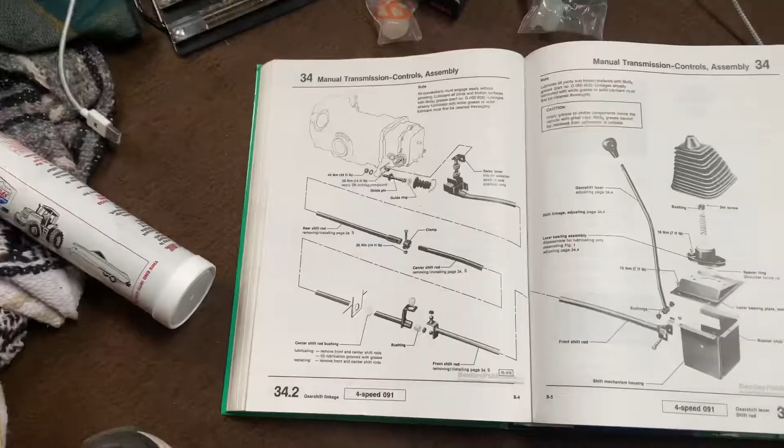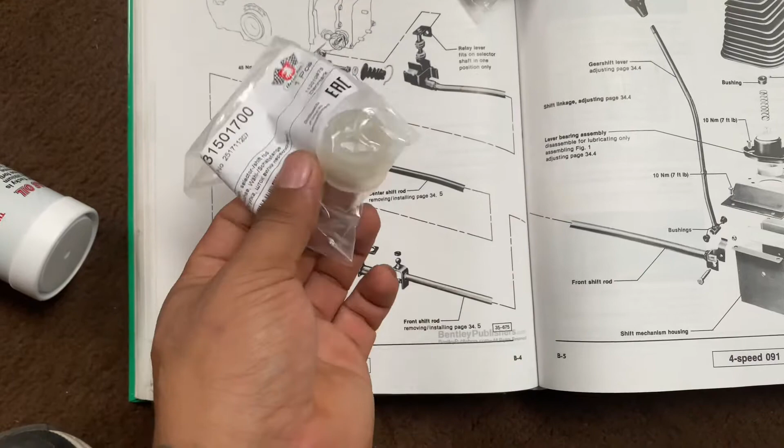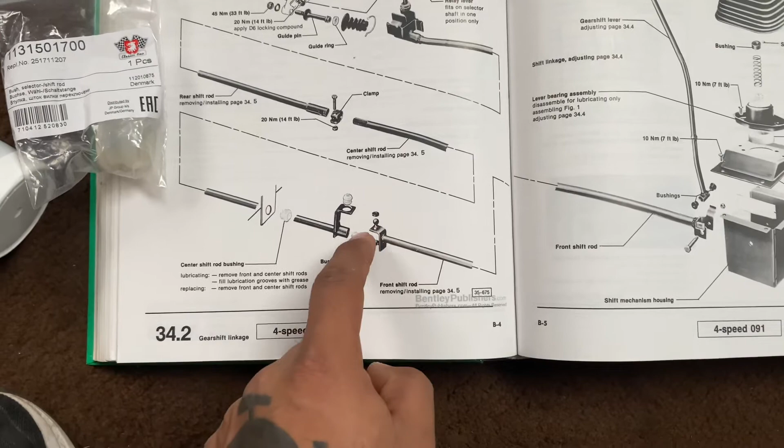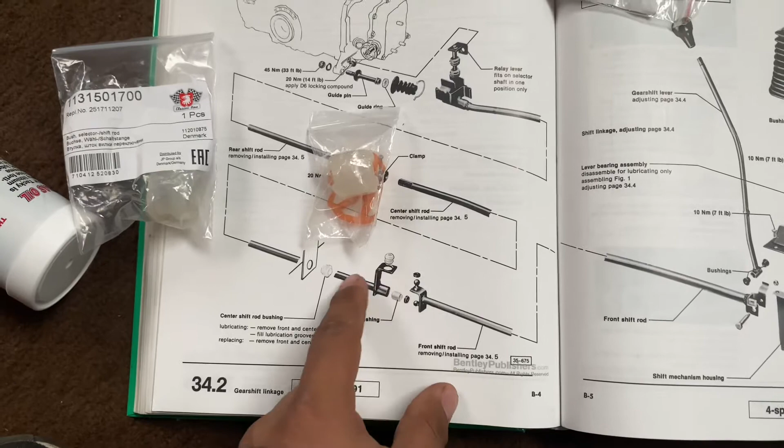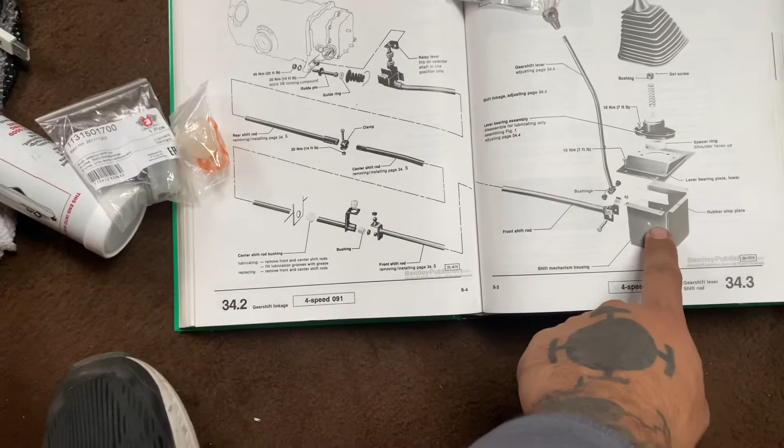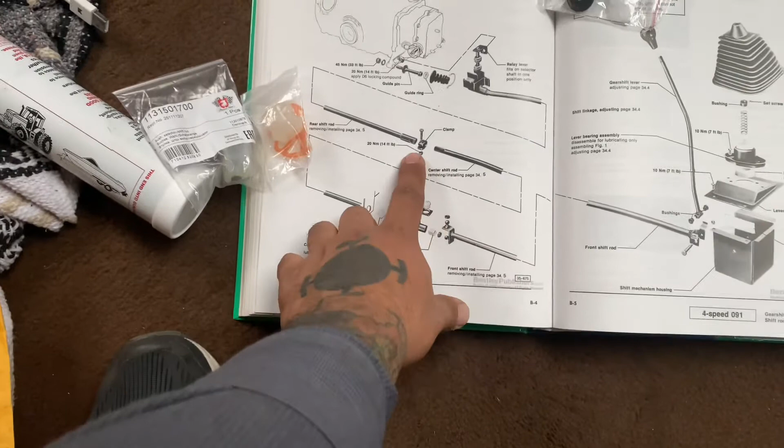So I think I gotta remove the box, then this bolt and nut here, and this one will pull out forward. I gotta mark it down here, that's towards the back. Mark it so I know how it fits, and then I can pull this out through the front.

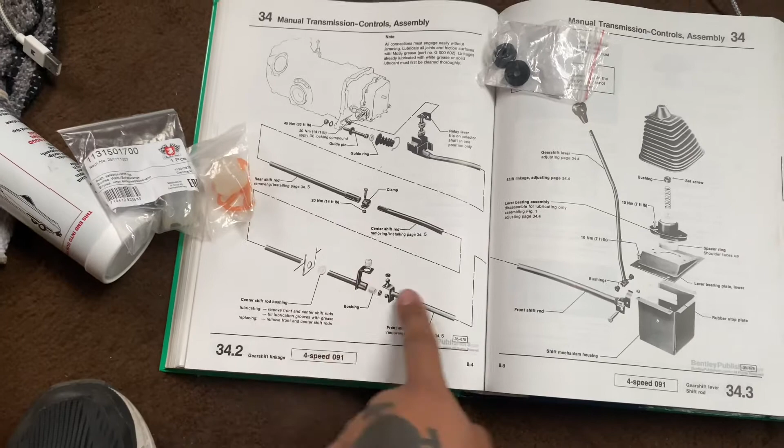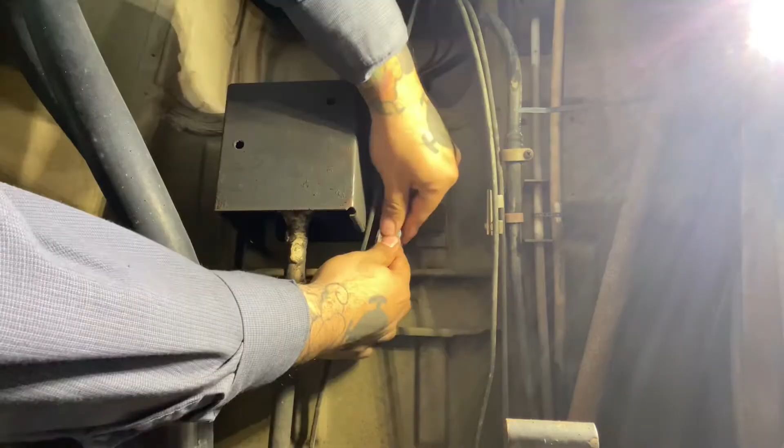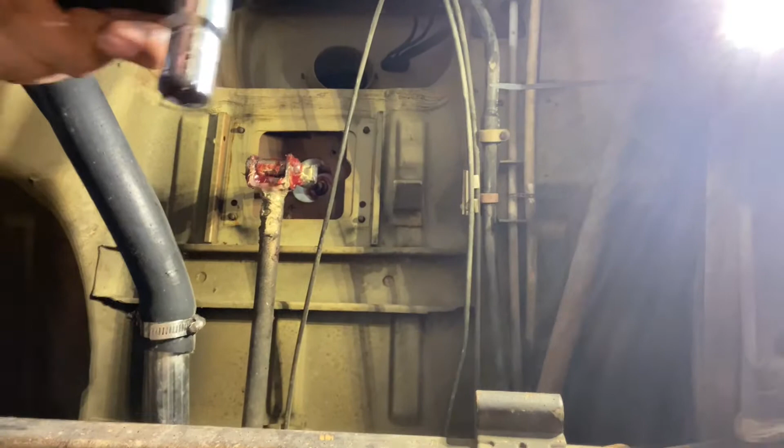So these 4 bolts are 10mm. Let's take those off. 13mm, 10mm.

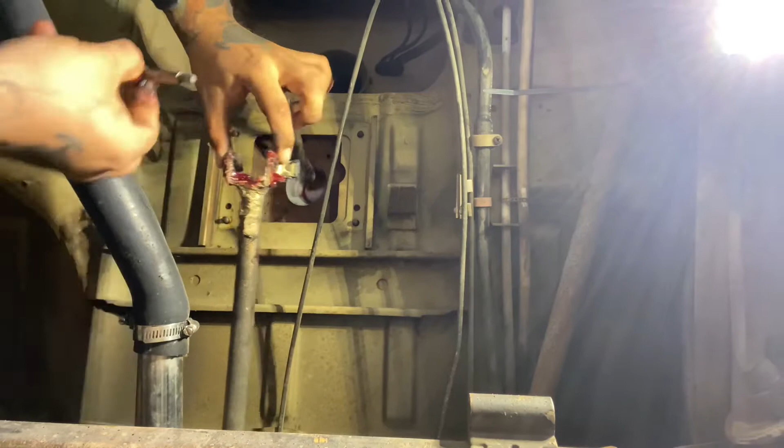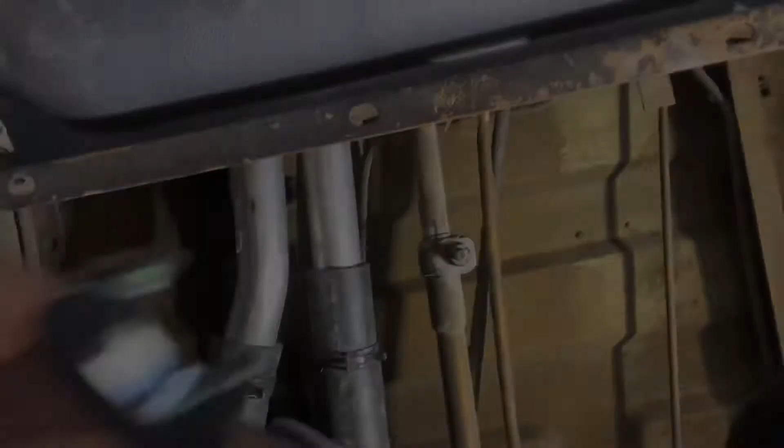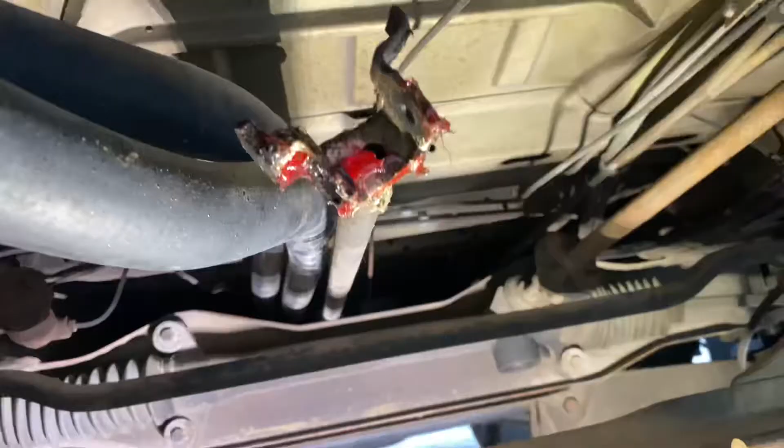And there it is. So now I'm behind the gas tank, and I gotta take this nut off so I can pull the whole thing forward and out. Before you take this one off, make sure you mark it so you know where to put it back. This is a 13mm bolt. And then this can slide out forward. Should be able to pull this out forward.

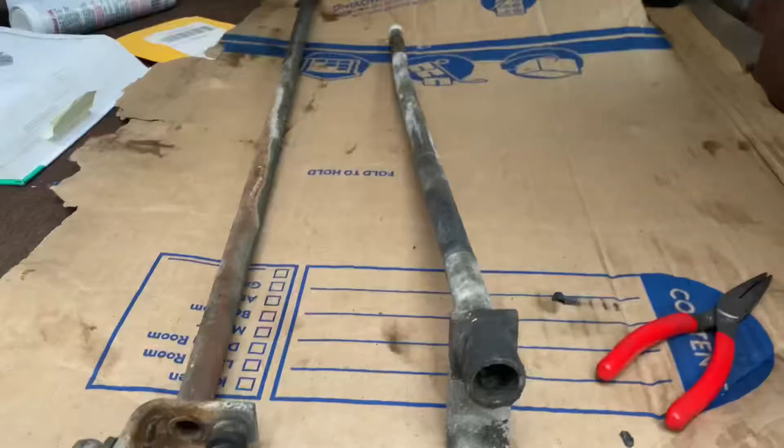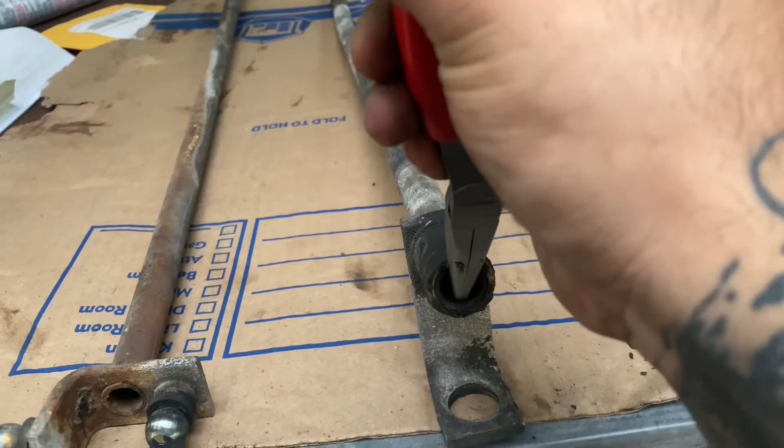So here are the 2 shift rods, and I gotta replace the bearing in here, which you can replace with this. You can just take this out, use a screwdriver or something, pry it in here, and pull that old one out. It comes out pretty easy. Takes 2 hands though.

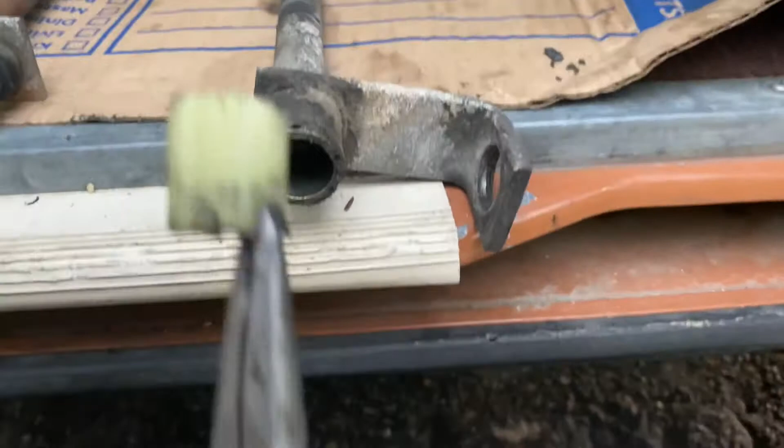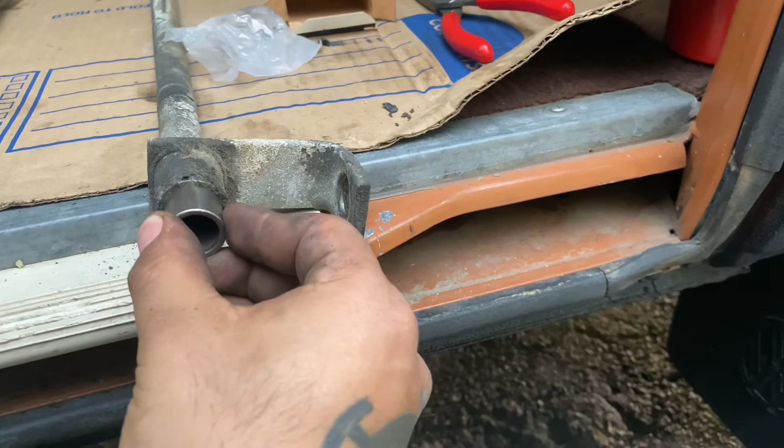There you go. Put the new one in. Here's the new one. And it doesn't fit. That's too big. I'll just use the old one. Seems pretty okay, I'll just flip it.

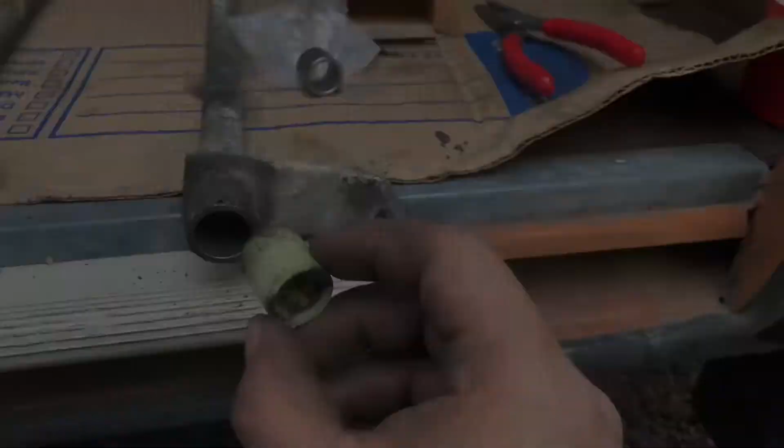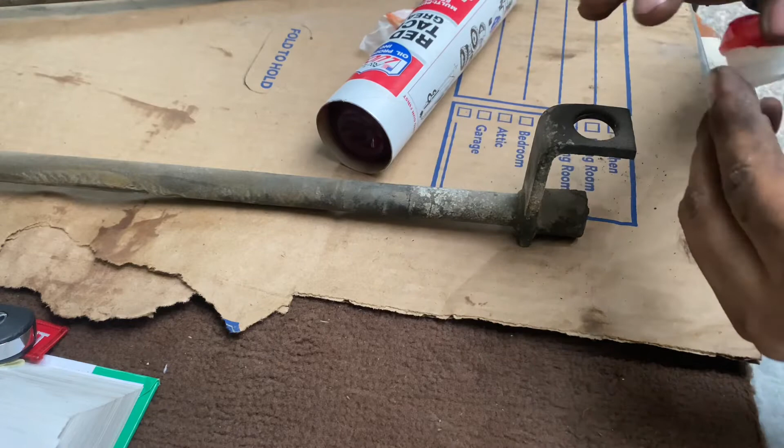So we're gonna need to insert this into here, but probably want to wear gloves. Probably want to grease the inside. Let's try the other way. There you go. Okay.

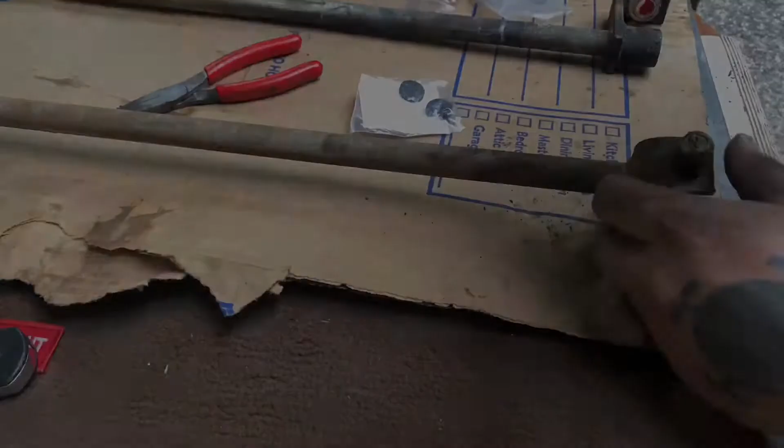So now I gotta install these onto here. There's 2 of them, here and there. We'll cut the old ones off. So go right on there. Right, like this. Probably want to grease all this up.

So that'll go over, there. And this will go in like that. See, that's a lot tighter, no slack. No slack there. That's good, okay.

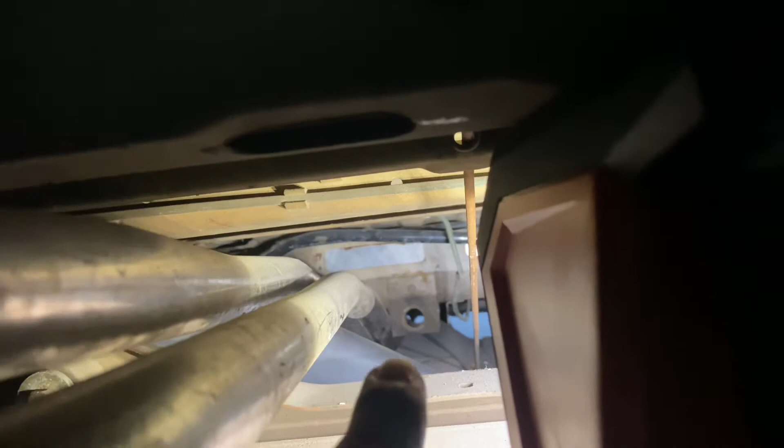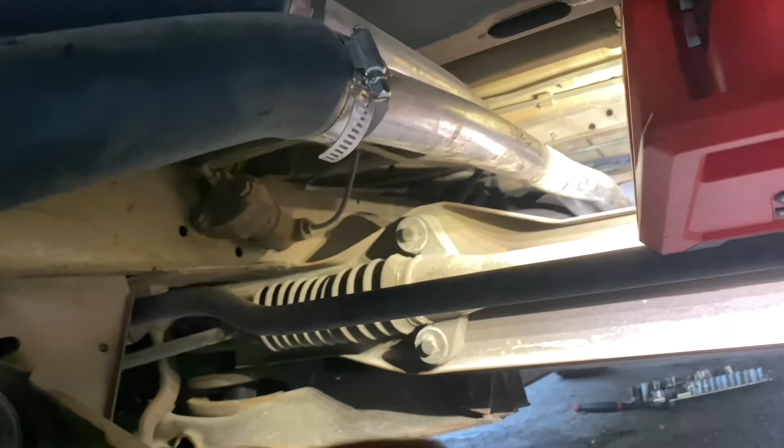Now this big one goes on a tab under the van. I'm gonna see if I can install that. So that bushing has to go inside there, but it's halfway between the gas tank, so it'll be hard to reach in there. I'm gonna see if I can grease this and put like the end of a broom and shove it in there.

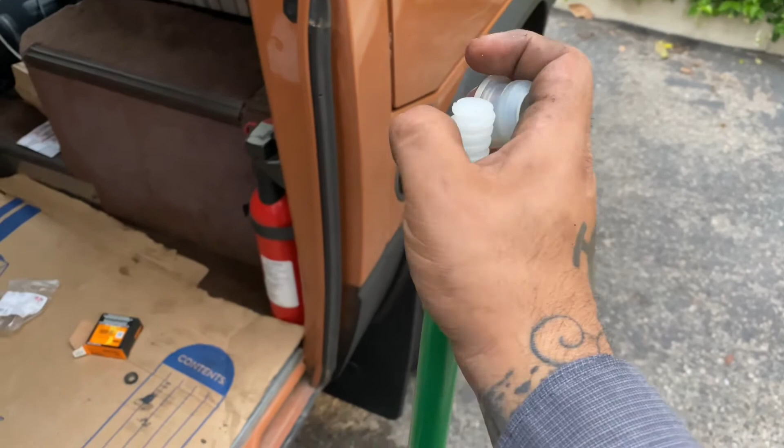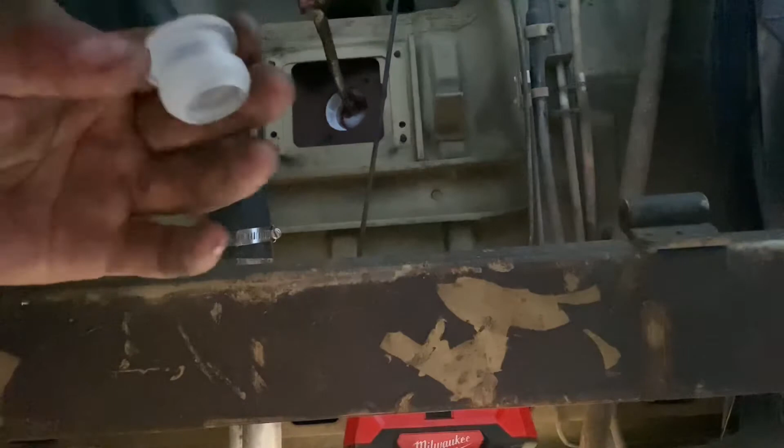So I figured out a way to put this thing in there. This is a broomstick, and this thing will fit right over it, but it won't go through, so you can push it. I'll just put grease on here and push it in like that. I'll show you, I'm gonna grab some grease and put it on here, like so. This is my mother-in-law's broom. She's probably gonna kill me.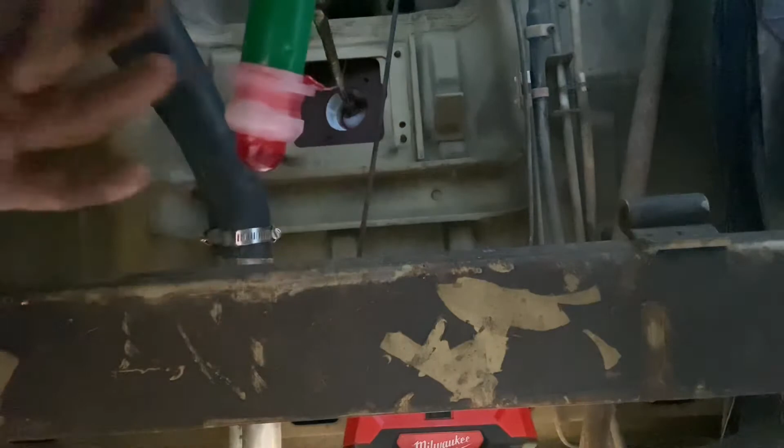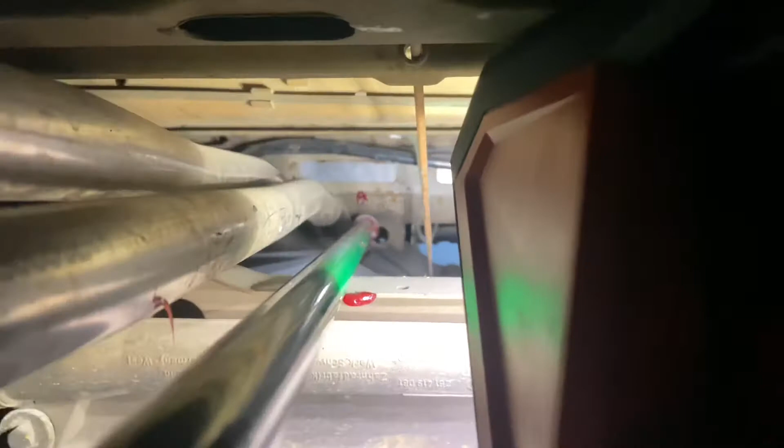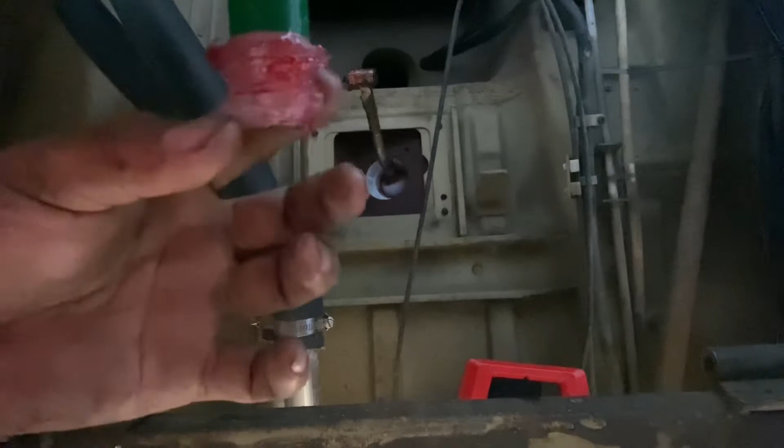And then you want to put it back there. Take your special broom tool, line it up back there. So I was having a problem that this was too long and it wasn't letting the front side compress. So I had to sacrifice my mother-in-law's broom. I'm gonna buy her a new one, but this should work now that it's shorter. All right, there it is.

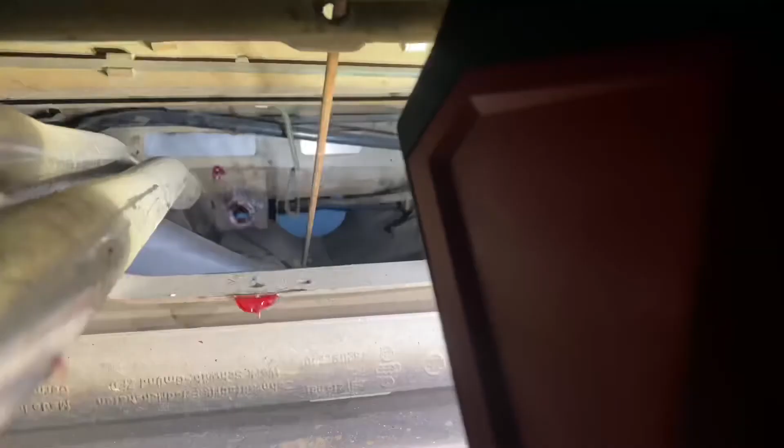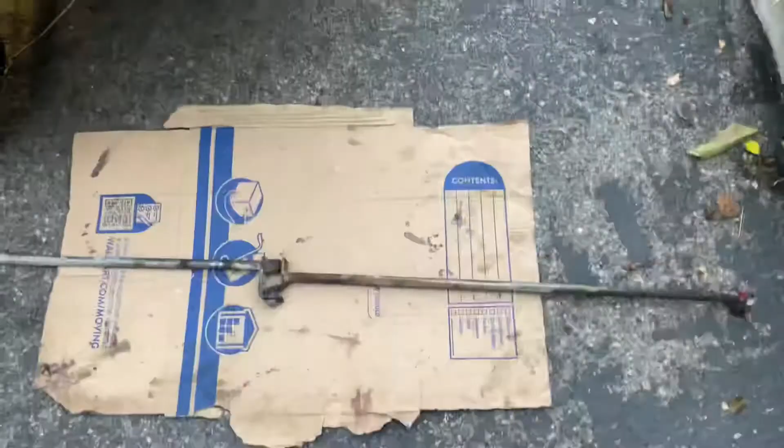Took about 20 minutes. I think you should probably heat that before you put it in with the broom, but it'll go. Grab your shifter rod, put some grease on here. Just put extra everywhere, it doesn't matter. Ready to go back in.

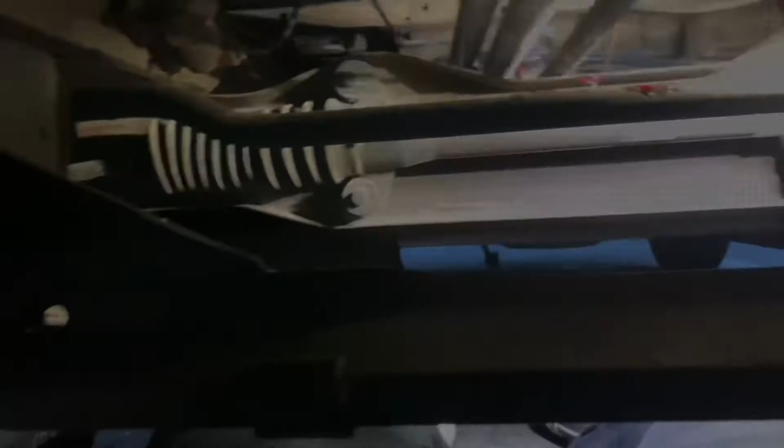All right, now that's back in there. Let's go to the back. Have your girlfriend push from the front. Push, okay. Okay, there, you're lined up perfect. Make sure your lines are lined up.

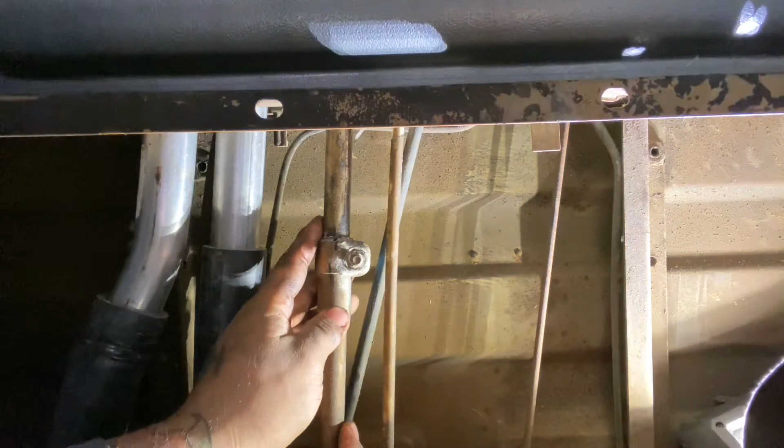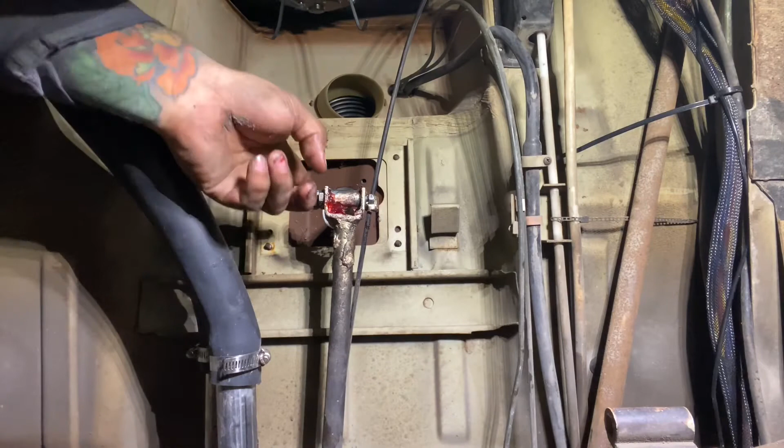And that's it, and then tighten these back up. So put this nut back on, and then the big end is a 13 millimeter, the small end is a 10 millimeter. So now you want to put on your gearbox again.

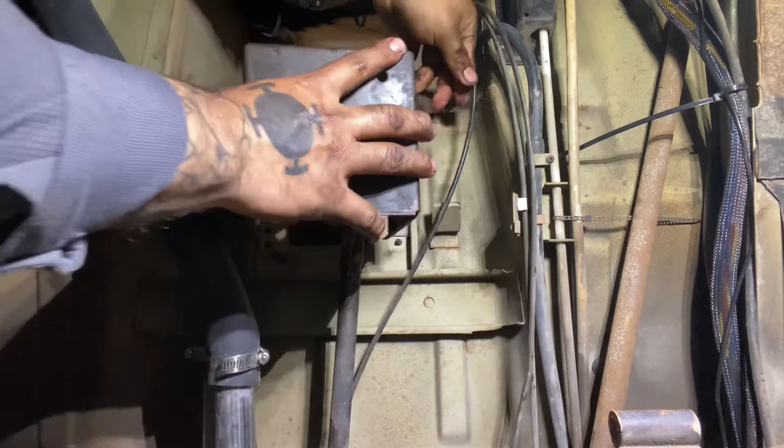And you can have someone push it from up top, so the screws or the bolts come down, so you can screw on the nut.